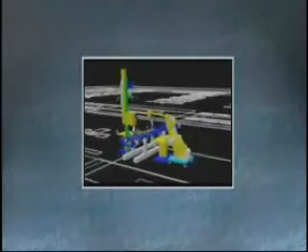On April 1st, UGS completed its acquisition of Tecnomatix Technologies Limited, creating the number one digital manufacturing solutions provider in the PLM market. Integrating Tecnomatix into UGS is a natural but significant step in UGS's digital manufacturing strategy. It represents another strategic milestone for UGS as it continues to expand its suite of software solutions to provide value across a product's entire life cycle, and demonstrates the company's continuing dedication to leadership in the high-growth sector of digital manufacturing. Tecnomatix is now UGS's digital manufacturing brand.

Tony Affuso, Chairman, CEO, and President of UGS, recently visited several Tecnomatix customers, such as Tesco Engineering of Auburn Hills, Michigan, to personally welcome them to the UGS family and to communicate the importance of this milestone for the client and for UGS. Tesco Engineering is an innovative Tier 1 supplier of automotive closure systems and a dedicated user of digital process planning tools from Tecnomatix.

Tesco CEO Jim Tennisketter, or JT, provided a recent tour of his facility and joined Tony in a candid conversation about Tesco's use of the tools provided by Tecnomatix and the vital role they play in Tesco's PLM strategy.

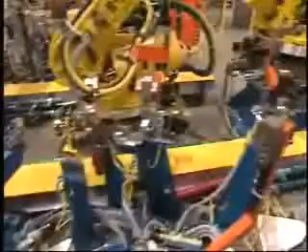Tesco Engineering is an automotive services, automation, engineering, tooling supply company. We are part of a larger Japanese group based in Hiroshima, Japan, called the Hirotec Group. Our primary customers here in the U.S., General Motors is our largest customer. The Budd Company, which is a large Tier 1. We do a lot of DCX work here in the U.S. We are also a key Honda supplier.

The automotive sector is an extremely grueling sector to work in. General Motors, as an example, typically wants us to have an 8% cost reduction to them on every product. The presentations that we've done for GM, we actually showed that our design costs have reduced by I think it was 50 to 60% since the late 90s by going into the 3D solids world, the virtual world. And we see that using the UGS products that we can and will continue to give them those 8% cost reductions per year and still maintain the profitability on our side.

Well, JT, you're doing some very impressive things with IT and with our technology, with UGS, and also we just acquired Tecnomatix. We think that the manufacturing area that Tecnomatix is in is a very important area and a growing area. It's a new way of doing business. We've had simulation and planning in our whole product design area before, but now it's moving into manufacturing. We see this area as one of the bigger growth areas in our business because it's helping customers around the world with their business. What value do you see Tecnomatix providing in your industry?

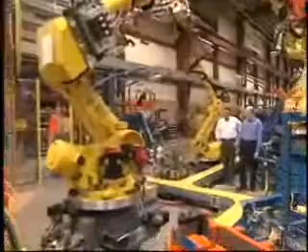We extensively use the Tecnomatix simulation products, and we've had a very good recent example where one of the major U.S. OEMs came to us and asked us to create a new flexible manufacturing system. They were looking for a 40% cost reduction from the previous line they purchased from us. Today, all those lines are running production at the required volumes and cycle times. Everything worked as planned in the virtual world, and we saved that customer 40% on their upfront costs.

It's a tremendous example of how you're using the technology and how you've revised your process and your people to take advantage of it. The ability to shrink your time to market, the ability to do these simulations in the computer instead of having to build hardware and test and try, must be a tremendous advantage to you in your cycle.

In the old days, our customers would have required us to build it in steel, set it up in a prototype lab area, and actually prove it out. That would have taken months and hundreds of thousands of dollars for us to convince them. With the simulation product by Tecnomatix, we were able to prove it out in a matter of a week at $3,000 to $4,000 in labor cost. Since then, we've had 120, maybe 130 installations of this in the field, and a rough estimate is each installation saved the customer roughly $100,000. So right there, we probably saved customers between $12 and $13 million.

JT, as we work with our customers across the world, many times what they say is it's just not technology. And we know that — it's more than technology. It's technology, it's process, and probably even more importantly, it's people. Those three things really have to come together to make the whole system work.

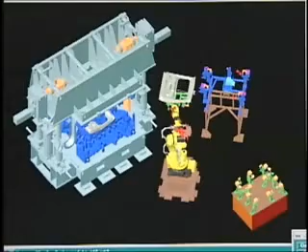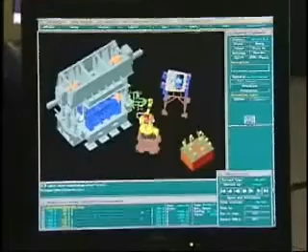Frank has an example of a Hemming system up on the screen right now. This is the one we talked about in the conference room that saved our customer roughly $12 million. Here we've got a traditional Hemming product, a press and die hemmer — one of our key products — being loaded and unloaded by this material handling robot in front. The cost savings I talked about are from a patented sequence of events this robot goes through to load and unload the hemming machine with a single robot in basically a single operation.

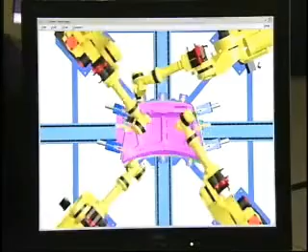The second example he's going to show us is a new technology we've developed called roller hemming. In this technology, we're doing the same function as the previous system, but with robots actually performing the folding motion on the hem, rather than using a large press and die type of assembly. As you can see from the simulation, it's a very tight, very confined area.

Trying to figure this out without the Tecnomatix simulation and planning packages would be very difficult. Now, Tony, we actually have a simplified version of this running production in our factory, so we can go out and look at this next.

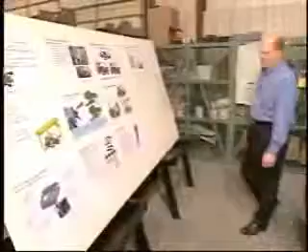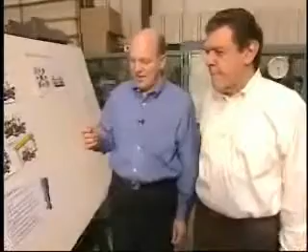Okay Tony, this is a board we've put up for our customers showing our new roller hemming technology and how we've set up our modular work cell, and how we're planning on selling it to them. When we were in the office and Frank showed us what he's doing in the simulation realm of Tecnomatix, he was actually looking at these different products.

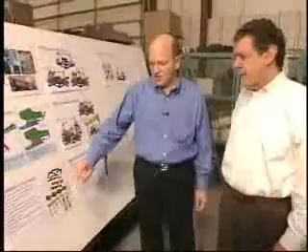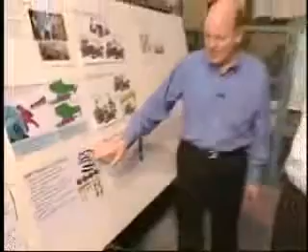What we're doing with the Tecnomatix product here that's rather unique is we're using our planning system, and we've developed this as a series of building blocks. You can call them Lego building blocks, whatever, but they're all standard building blocks that we've engineered, pre-configured, and tested, and we've put them in a planner library, which is our central database. It controls the use of those building blocks, controls the maintenance of those building blocks, and controls all the costing of those building blocks.

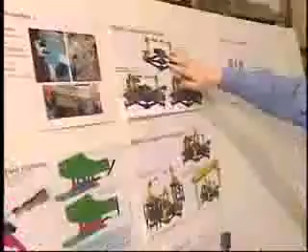I can now take my planner engineer, and the planner engineer can configure these building blocks in multiple configurations for different volumes. We get the basic RobCAD simulations, so we're set, and we also get the costing, so we're ready to take a quote right to the customer and nail down a price.

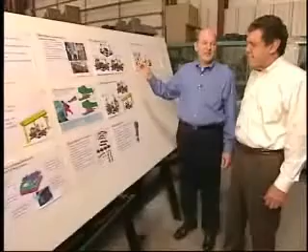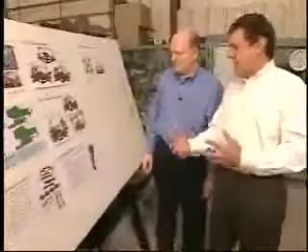Boy, that's a tremendous use of best practices. So you're able to reuse all this innovation, all this technology, and assemble them into different configurations for the customer, and you can do that at a quicker time to market than before.

Why don't you come over here, Tony, and I'll tell you what we're talking about. That sounds great.

This is the prototype department of our shop. This is an area where we're actually running production for our OEMs of their new vehicle closures. Prior to them having the entire engineering done, they need to make a certain number of prototype vehicles to run crash tests and fit and finish, and just to do final buy-off on the car.

So once you get your machine out here, if there's a problem, it's very expensive to change it. But we're actually doing double duty with this area.

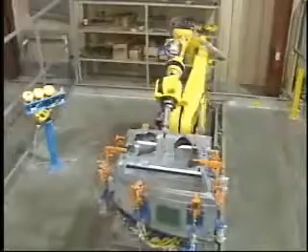This is the cell we saw on Frank's Tecnomatix simulation in the office, and we've actually put it into production in our facility. We're using this for both a development cell and a production cell to satisfy our OEMs. If you watch it run, you can see it's very compact, very quick, and a very clean running system.

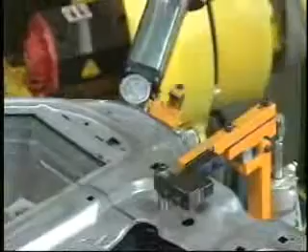I tell you, the work you've done here in your company is just amazing. You've got your time to market down, your costs down, your quality up, and your innovation has just been fantastic.

It's great to see that our tools are helping you out, making your job easier, and getting your customers happier. So we're committed to continuing our investment in UGS and Tecnomatix, and committed to continue our work with you and your team.

JT, I want to thank you for inviting me here today. I've had a marvelous time. I've learned a lot, and I'm very impressed with your company, your people, and your products. I'm glad you could join us, Tony, and I'm glad you see value in what we do. That's great, JT. Thank you.